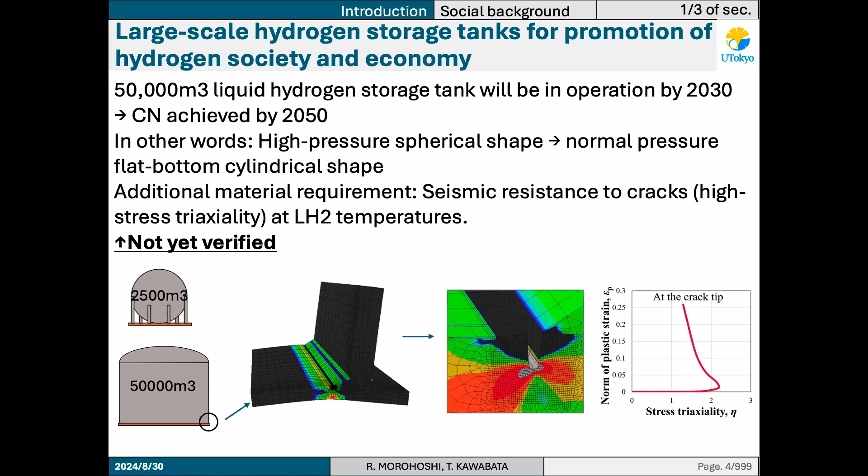However, we couldn't finish it yet. So we see that the steel with transformation-induced plasticity is a good candidate for this project. However, there's a big problem: we couldn't understand the behavior of the TRIPs around the crack tips.

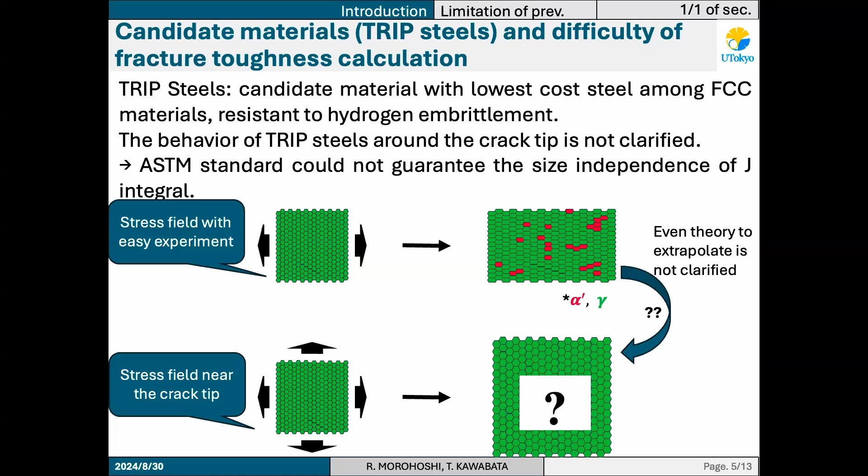That means that the standard like ASTM could not guarantee the size independency of the fracture toughness. So obviously it's a big problem.

For example, there are four major previous studies investigating the stress field dependency of the Martensitic transformation. Especially in the data around high stress triaxiality, it's similar to this fact that it's contradicted to each other.

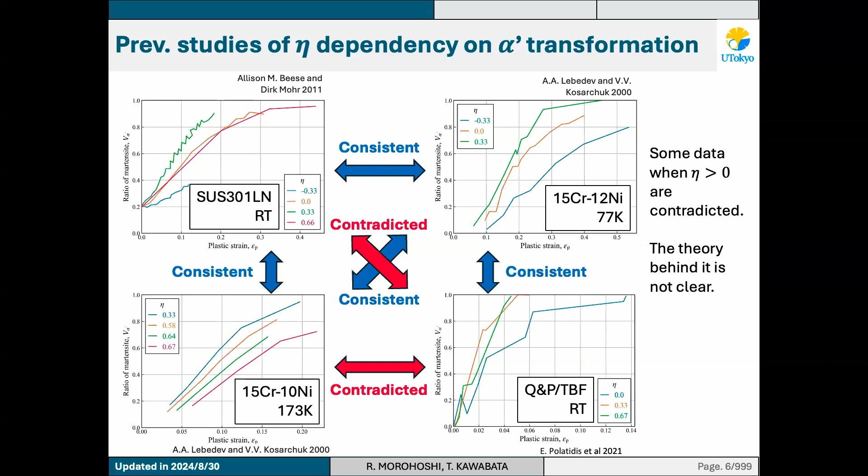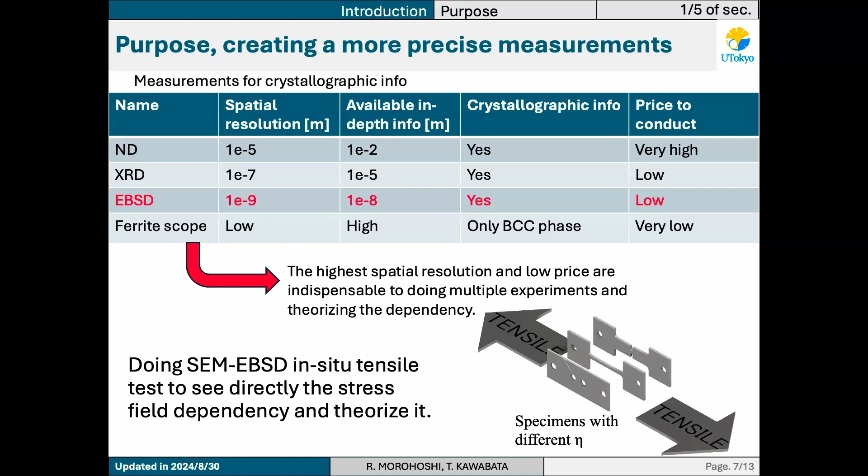So we need to choose the most precise way to measure the stress field dependency of the Martensitic transformation. Eventually we chose the in situ SEM EBSD tensile test as the best one, because the highest spatial resolution and the low price are indispensable to doing multiple experiments and theorizing the dependency.

Next is about the experimental procedures. This slide is about the material and the facilities. We use the 301L austenitic stainless steel because this is the metastable austenitic stainless steel at room temperature.

This is the tensile tester, and the specimen is set here, the tensile tester is set into the SEM, like the schematic images. So as you can imagine, making the tensile tester and conducting the experiment is pretty complicated.

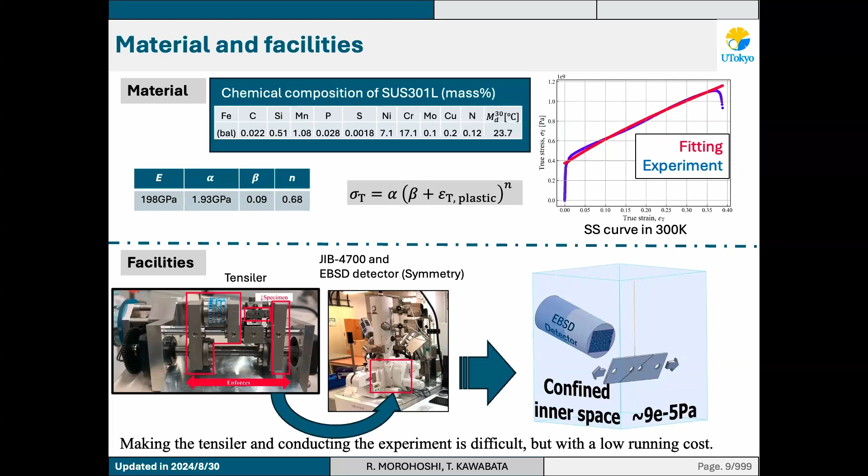But we can do it with a much lower running cost. So it's obviously the beneficial point.

This is the specimen that we use. We arrange three kinds of specimen, each having a different stress triaxiality: 0.5, 0.0, and 0.33. We call each specimen the notch specimen, shear specimen, and uniaxial one.

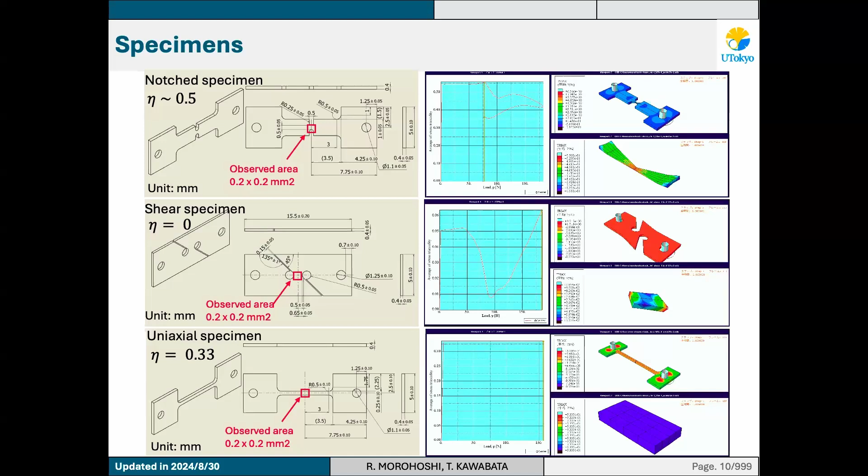Next is about the result and discussion. First, this is the result in the notch specimen. The loading direction is horizontal.

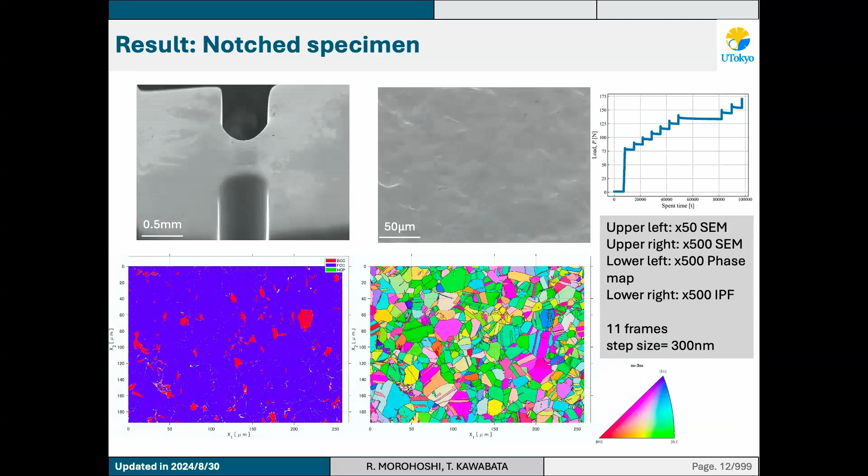As you can see, the upper one is the SEM, the lower left is phase map, and the lower right is IPF.

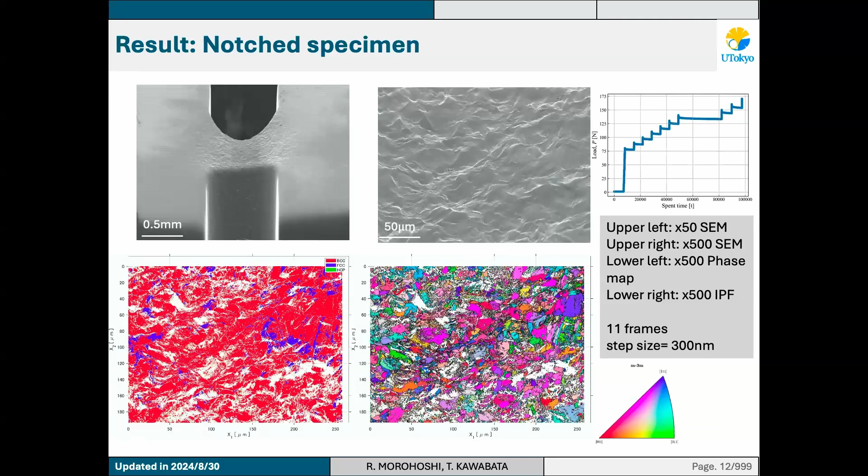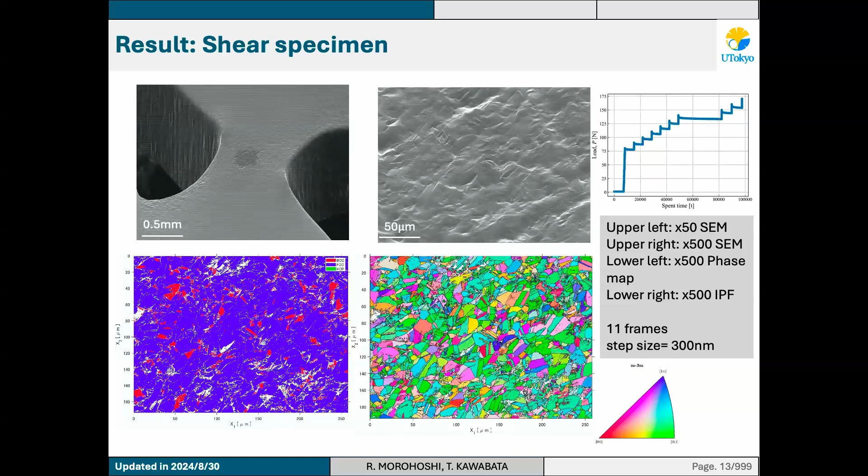The next is about the shear one. It's pretty visible that the Martensitic transformation happens as it is loaded, and wrinkles because of the TRIP can be observed. The last is about the uniaxial one.

For example, this is the overlay of the grain boundaries of the notch test. The black line is showing the EBSD at 105 Newtons, and the red one is at 115 Newtons. From the naked eye, two things can be observed easily.

One thing is that red lines are stretched more horizontally, and then we could identify which grains correspond to the grains on the other load.

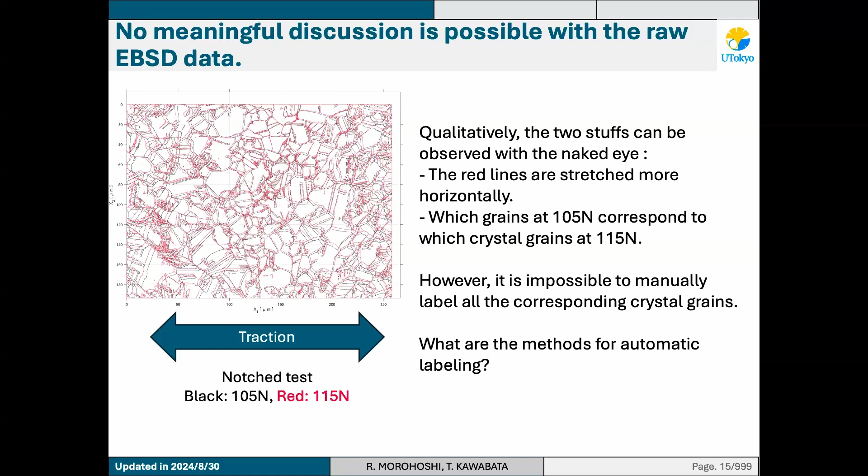However, obviously it's impossible to manually label all the correspondences. So we need a kind of automation to detect the deformation of the grains. So I made a kind of system to detect the deformation of the grains.

Probably, as you know, the most famous way to detect the deformation of the grain is digital image correlation. Let me briefly introduce the comparison.

The main disadvantage of DIC is that we need to spray something on the surface, which interferes with the EBSD pattern. However, on the other hand, the spatial resolution of the triple point matching will be much coarser than the DIC, obviously, because the patterns are much closer.

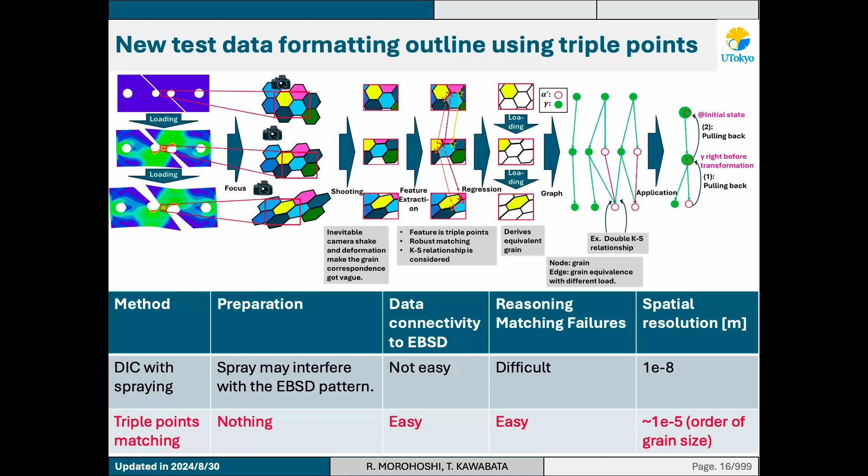Let me introduce much more about the post-processing process. This is the triple point. We identified all the triple points at each load, and we identified which triple point corresponds to which triple point on another load, in a way I'll omit since time is limited. But by doing that, we could identify the deformation of each triple point, and then we regress the deformation of the triple point into any coordinate, assuming the affinity.

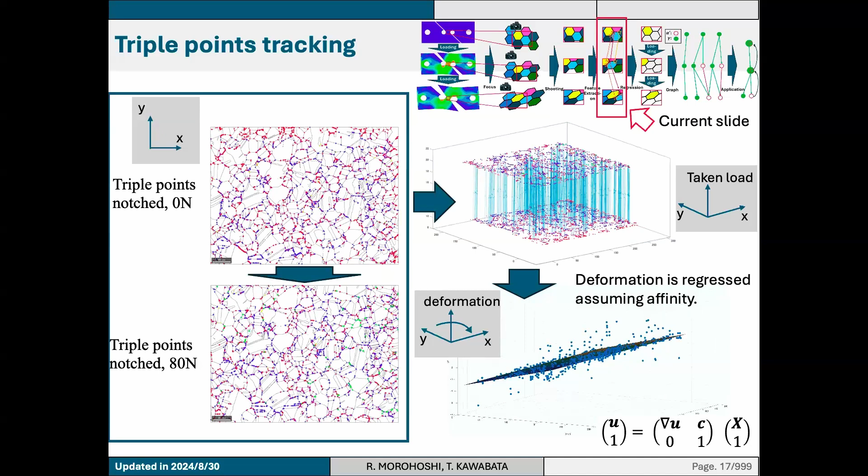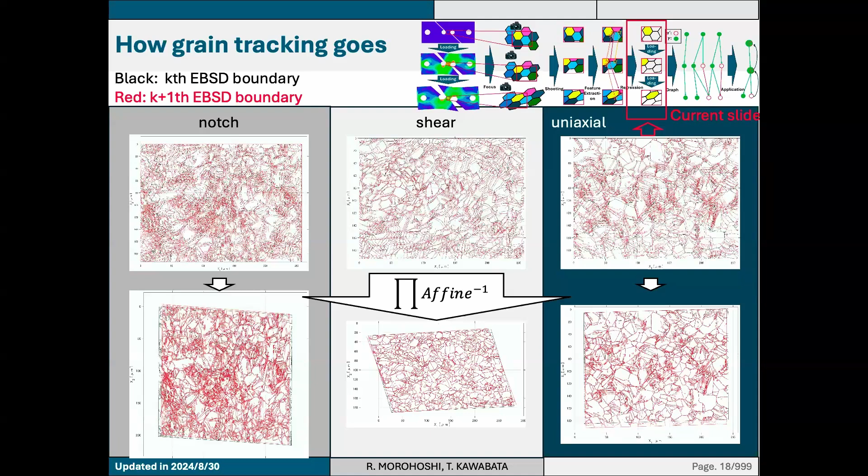I mean the linear regression. So the next slide shows whether affinity regression is precise enough. These are movies about the overlay of the grain boundaries. If the affinity regression is precisely enough, the original coordinate of any grain at any load can be calculated through the inverse of the accumulated affine transformation matrices. These are the movies after applying it. In other words, the grain keeps stationary after applying it if the affine regression is enough. So seemingly that's enough.

This is a typical example of how the grain tracking goes. These are the subgraphs of the grains, as shown in the right one. So we could identify the transition of every grain and when it is transformed into martensite. The clip with red grain boundaries is a kind of artificial EBSD showing where the austenite is just before the martensitic transformation.

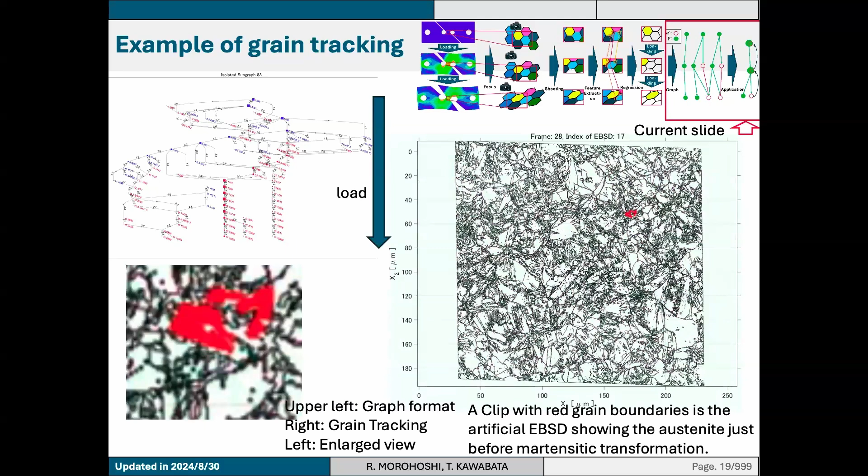By doing a lot of stuff, finally we could identify the effective strain by calculating the deformation, because we represent the deformation as a single linear function, so we could represent the single effective strain. Finally, we could compare previous studies with our own.

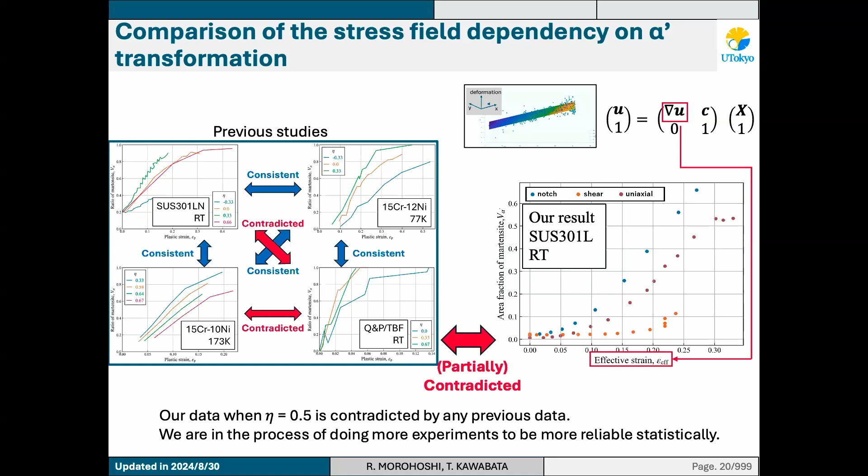However, our data, when the stress triaxiality is about 0.5, contradicts previous data. So we are in the process of doing much more experiments to validate which is correct, mine or others.

As a side note, this result shows where transformation happens easily. The black line shows the initial grain boundaries, the red one is the initial martensite, and the pink one is the remaining austenite at last. The other colors show when it is transformed. Yes, it's effectively showing where it is transformed early.

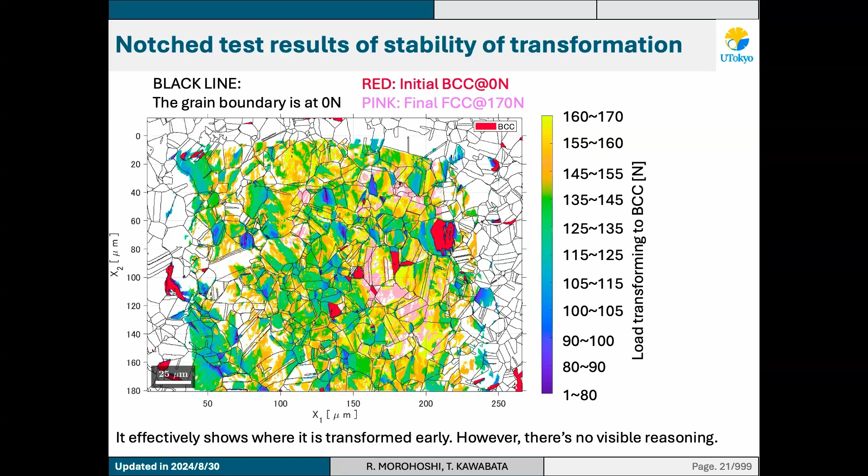However, there's no visible reasoning behind it. We could say that at least the martensitic transformation can happen from the grain boundaries, but that's the only thing I could say.

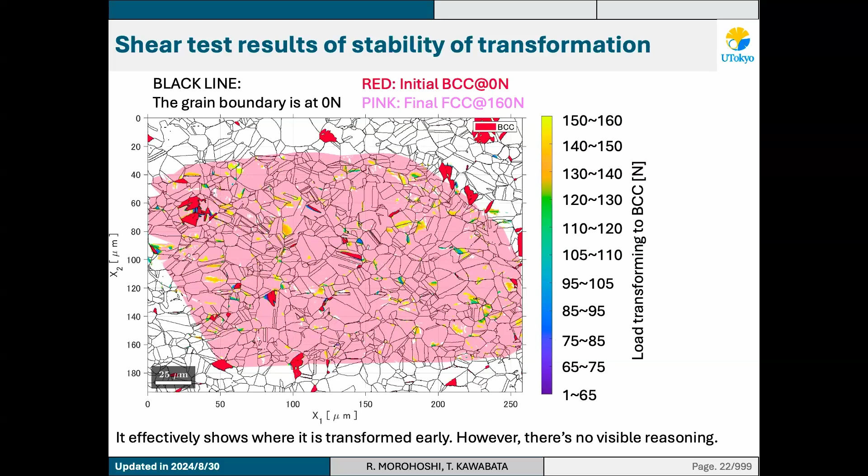The first is that the stress field dependency means Mises criterion is inaccurate somewhere, so maybe the Schmid factor plays some role. The second is that the stability of austenite with different grain sizes might differ with the stress field.

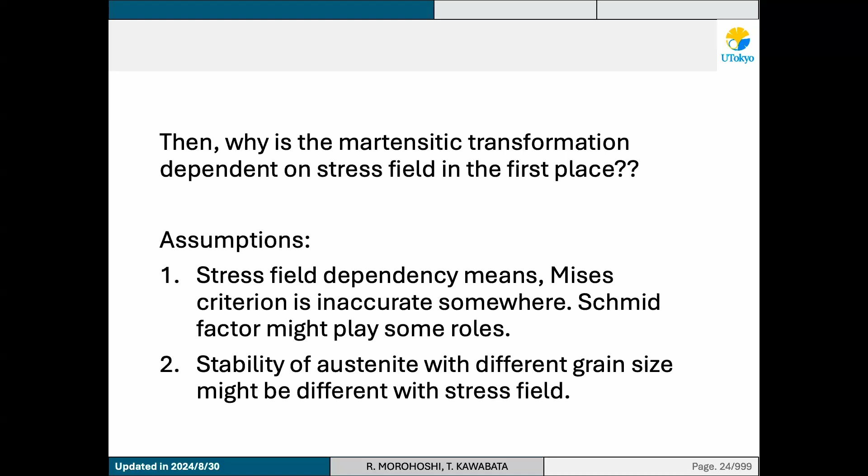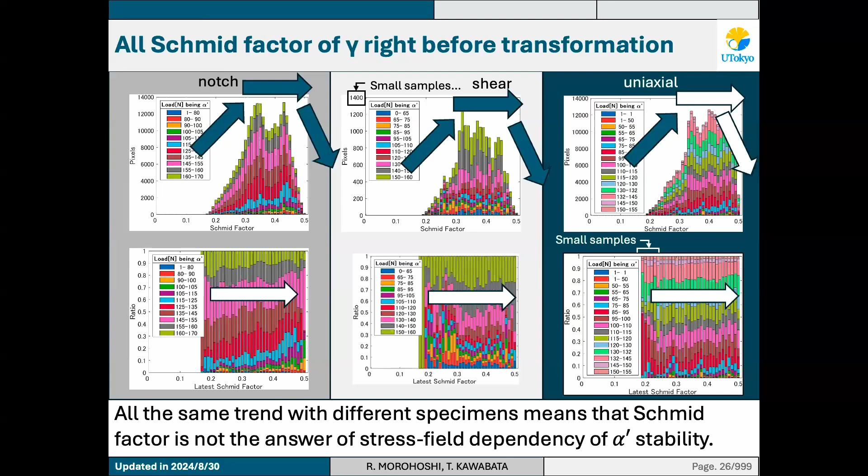This is all the results with different triaxiality. However, they indicate all the same trend, which means the Schmid factor is not the answer to the stress field dependency of martensitic stability. So next is about grain size.

In two cases, the x-axis shows the initial grain diameter, and the y-axis is the amount of newly made martensite. In both cases, as the initial grain diameter increases, the newly made martensite increases. However, only in the shear case did it not follow that trend.

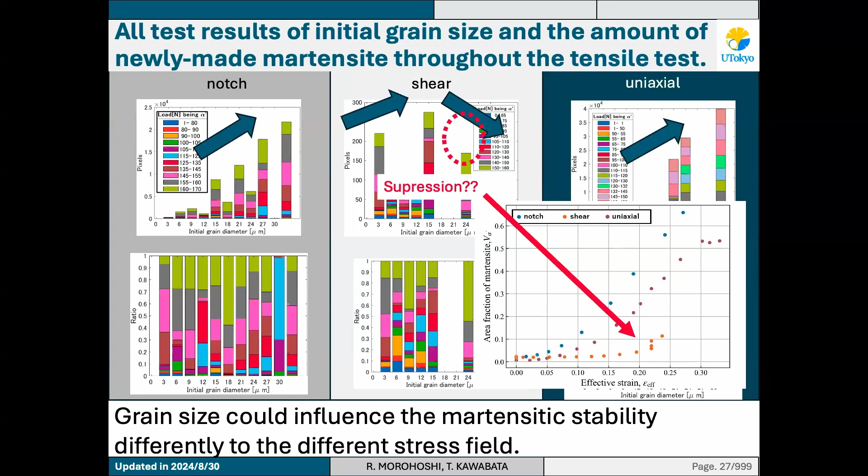So maybe this happened due to a kind of suppression leading to the overall martensitic transformation. We think so, but it's just an assumption. So we need to do much more experiments to ensure that. So this is the conclusion. Thank you, thank you very much.